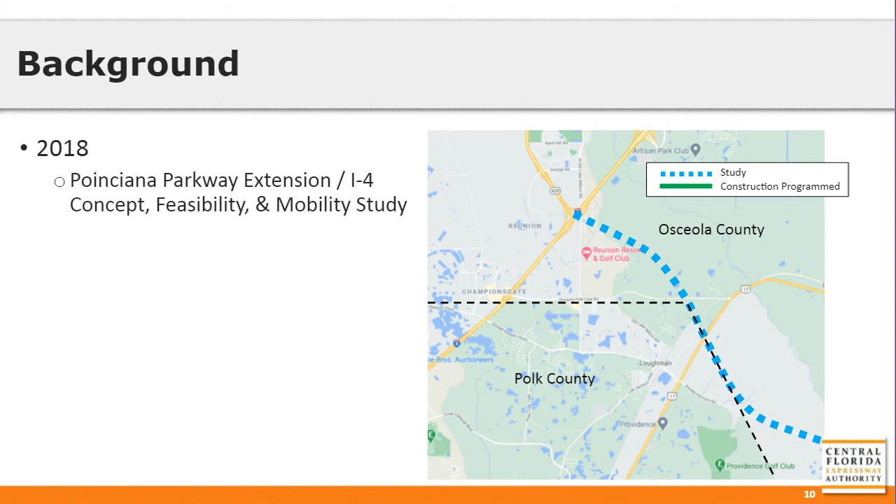This improvement of County Route 532 is part of a coordinated effort to improve the transportation conditions in the area. In 2018, CFX completed a concept, feasibility, and mobility study to determine how best to improve and extend Poinciana Parkway to I-4.

In 2019, CFX then completed a project development and environment, or PD&E study, to determine the alignment for the extension of the existing Poinciana Parkway to County Route 532. This study also identified the need to improve the connection of County Route 532 over to I-4. The study findings were shared with other transportation agencies, including the Florida Department of Transportation, to ensure that roadway improvements were made in a coordinated fashion.

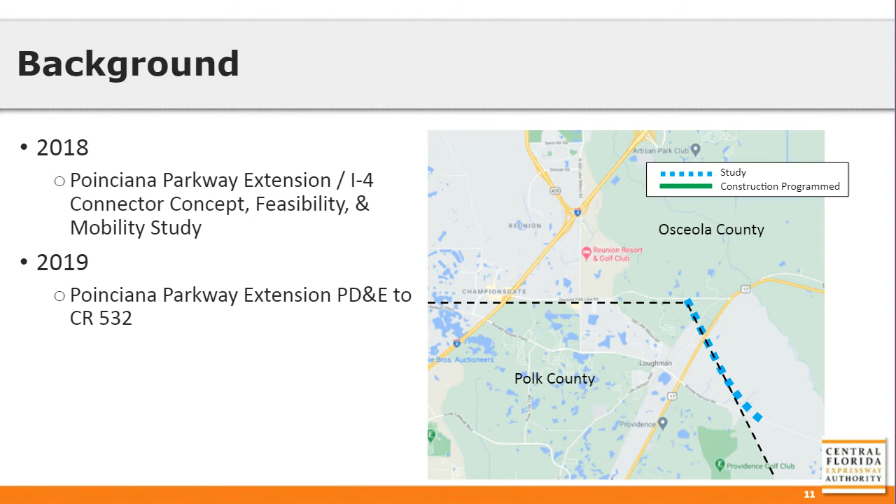In 2020, CFX began the design of the Poinciana Parkway extension from the existing Poinciana Parkway up to County Route 532, and expects to begin construction of that section in 2022.

Currently, CFX, in partnership with Osceola County, is studying and will design improvements of County Route 532 from South Old Lake Wilson Road to US 17-92. Construction of this project is expected to begin in late 2022 and will provide a 4-lane connection from the Poinciana Parkway to I-4.

Recognizing the congestion at the interchange of County Route 532 and I-4, FDOT and Osceola County have started designing improvements to that interchange. Due to congestion on I-4 between County Route 532 and State Route 429, FDOT and Florida's Turnpike are currently designing additional lanes on I-4 between County Route 532 and State Route 429.

Construction of the improvements to the interchange of County Route 532 and I-4 will begin in the spring of 2021, and construction of the improvements to I-4 are expected to begin in the fall of 2021.

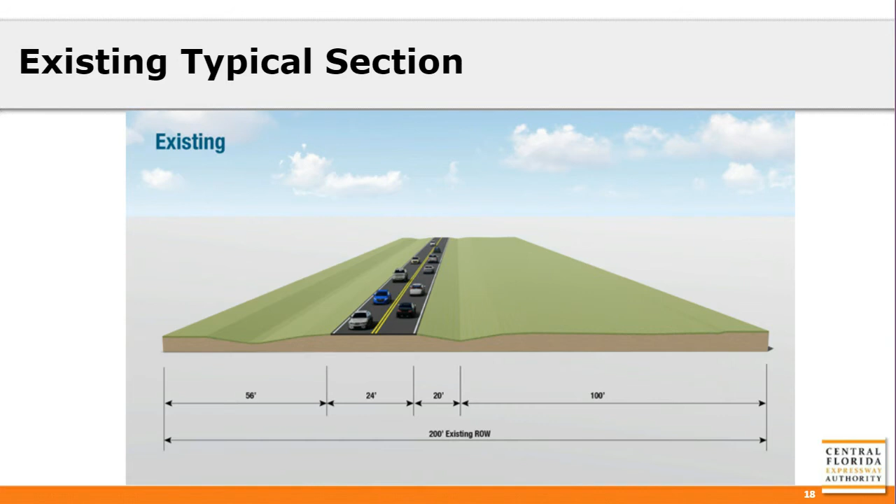We will now discuss the project alternatives. This graphic shows the existing roadway typical section of County Route 532, which is a two-lane undivided roadway located in the northern half of the existing right-of-way.

Three build alternatives are being analyzed for County Route 532, with the primary difference being the typical section of the roadway. No additional roadway right-of-way is required for any of the alternatives. However, additional right-of-way will be required for stormwater runoff ponds.

This slide, along with the next two slides, focuses on the differences between each alternative. All three alternatives include a 4-lane divided roadway with 12-foot lanes, a variable width planting strip for landscaping on both sides of the roadway, a 10-foot shared use path on the north side, and a 5-foot sidewalk on the south side of the road, which may be substituted with a 10-foot shared use path if desired. All three alternatives also have an enclosed drainage system with curb and gutter along the outside lanes.

Alternative 1 includes a 30-foot raised median in the center of the roadway, 4-foot inside shoulders, and 7-foot bicycle lanes in each direction. The design speed for this alternative is 50 miles per hour. Please keep in mind that the design speed does not mean that's what the posted speed will be when the project is complete. It is simply the speed that the road is being designed to.

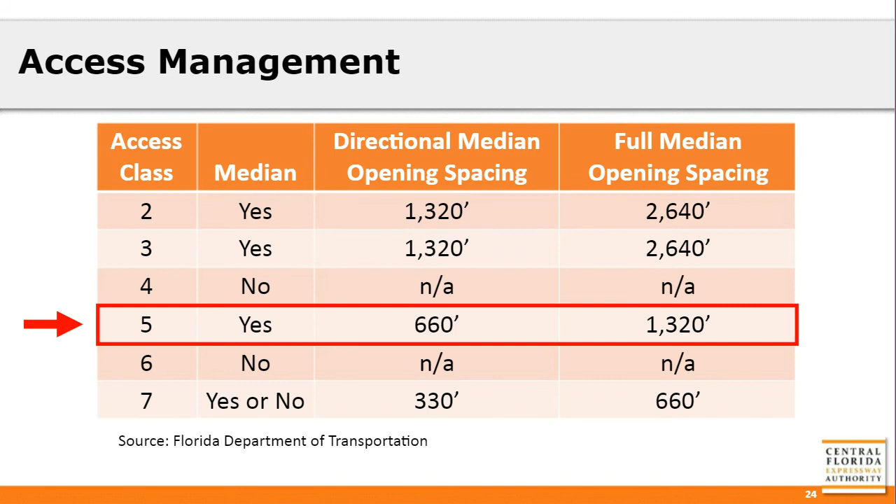This slide depicts our draft access management plan, which is currently under evaluation and subject to change. As a reminder, directional median openings allow for right in, right out, and left in turning movements accessing the side street. However, left turns out from the side street are not permitted.

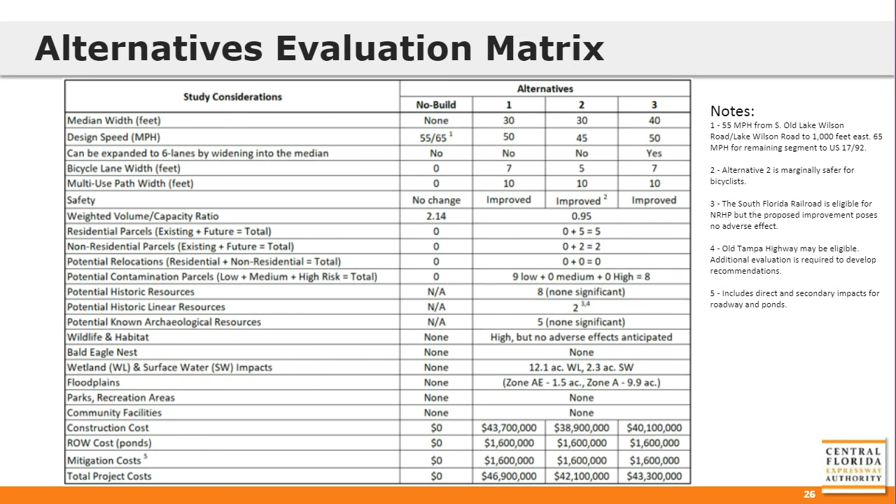The next steps as we go through the process will be to identify a preferred build alternative, finalize engineering and environmental analysis, prepare the engineering and environmental report, and present our findings to both the CFX Governing Board and the Osceola County Commission.

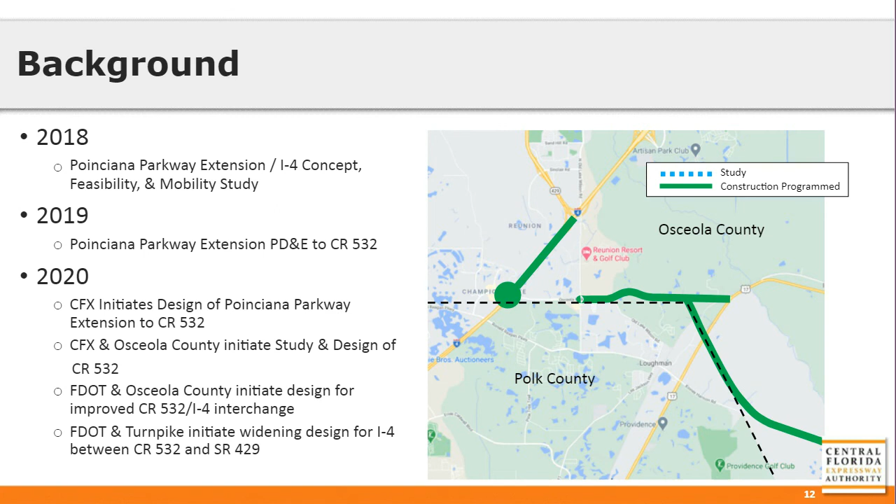Okay, very good. And then, so why exactly is the study being done for the County Road 532 widening? Well, before the project can be designed, the study portion of the project is to provide CFX and Osceola County the information that they need to decide on the preferred typical section for the roadway.

Now, because CFX is involved, does that mean that there's going to be a toll associated with County Road 532? No, absolutely not. CFX and Osceola County are partnering on this project because the extension of Poinciana Parkway will end, at least for a number of years in the future, at County Route 532. And traffic is expected to increase along County Route 532 in the future as drivers from Poinciana Parkway Extension make their way over to I-4. But there is no plan to put any tolls whatsoever on County Route 532 itself.

Okay, and you had mentioned Polk Parkway there. Poinciana Parkway, that there are plans to extend that to I-4, correct? Yes, I apologize, you're right. Poinciana Parkway is shown in the graphic here. CFX is currently widening the existing section of Poinciana Parkway to 4 lanes, and then there's currently a design to take that section all the way up to County Route 532, as we've already discussed. And then from that point, the Florida Turnpike is considering extending Poinciana Parkway past County Road 532 up to I-4. And the Turnpike is currently conducting a project development and environment study on that extension to determine the best alignment.

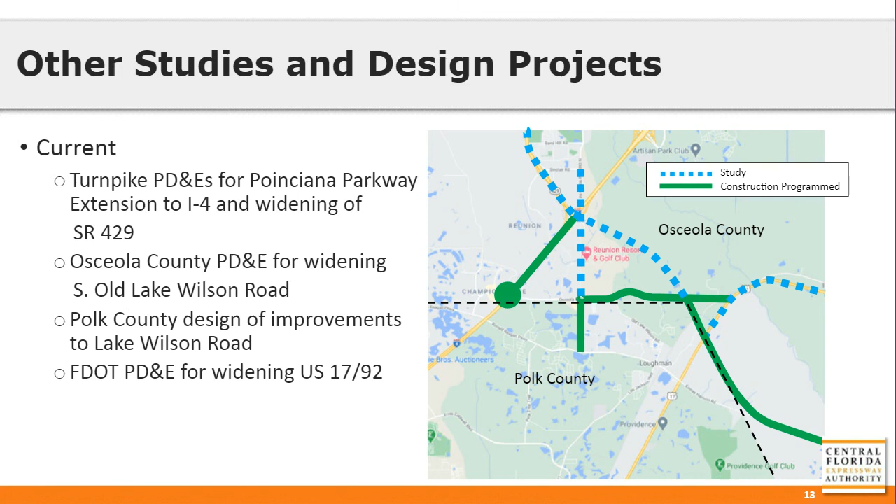Dana, thinking about the study and everything that's happening, when do you anticipate that this study portion will be complete, and then what are the next steps? Certainly. This study was started in June of 2020 and is currently underway, as we discussed, and it's anticipated to be completed by July of this year, 2021. The project will then very quickly enter into the design phase, and that should last about a year.

And then what occurs after the design phase?

Once the design phase is completed, construction is already funded in the CFX work plan, and it could start as early as late 2022 or early 2023. The widening completion is expected to coincide with the completion of the Poinciana Parkway extension, which should all occur around the fourth quarter of 2024.

Okay, very good. And I know that people in the area, quite often when we have construction projects, are concerned about potential impacts from construction. Will property be impacted by construction?

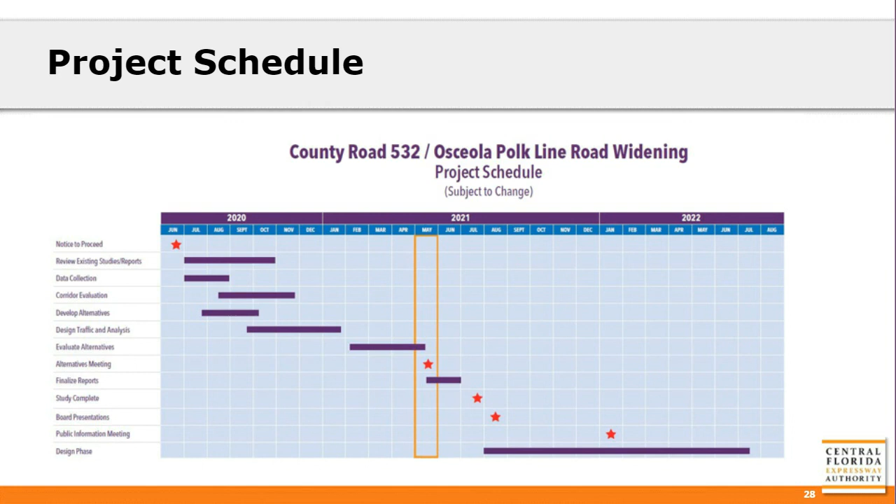Yes, we certainly understand people's concerns about access to their properties. Access will remain for all properties along the corridor during construction. So no matter what construction is going on, people will still be able to access their homes or their businesses throughout the life of the project.

However, if someone has a specific concern, we ask that they provide us with their property address or parcel ID, some way that we can identify where the property is. Then someone will follow up with you to discuss the location of your property in relation to the study alternatives or even during construction itself.

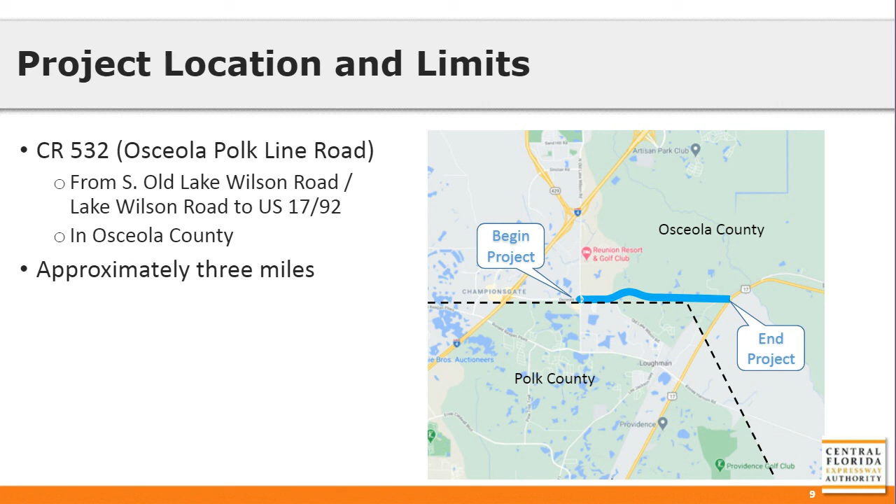All right, terrific. And we do have a question about when land acquisition might begin for this project. Could you speak to that?

Certainly. Again, I want to remind everyone that we don't have a need to take a long stretch of right-of-way along the corridor, as you might see in some projects, because the right-of-way is already out there for us to do the roadway widening itself.

One other thing that we've had happen in the past is we've had some folks ask us if there are sound walls associated with the project. No, there are no sound walls associated with this particular project. There will be no sound walls along County Road 532 when the construction is completed.

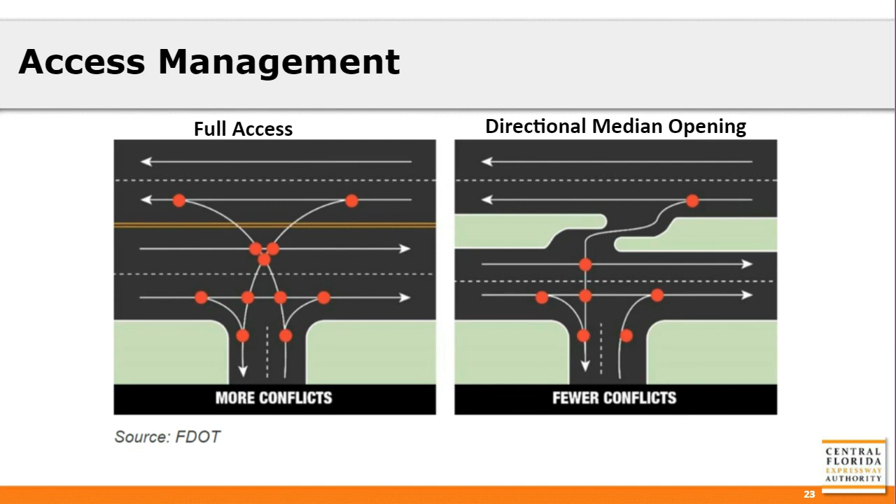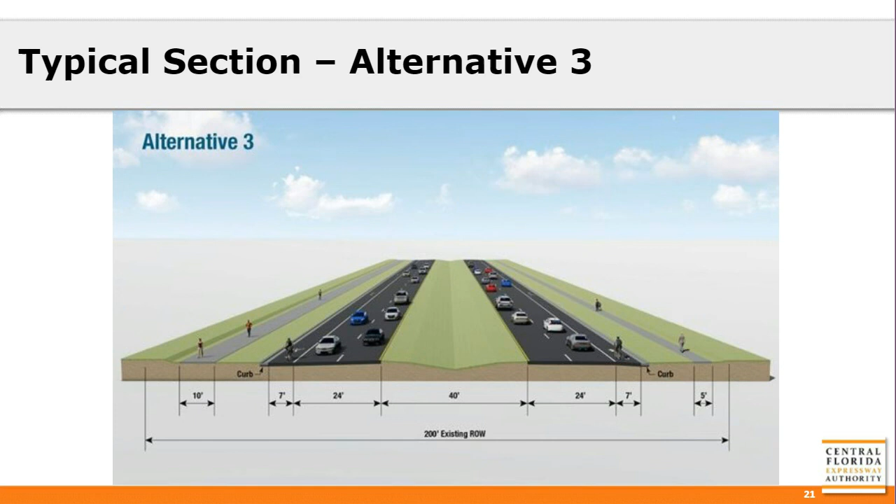Okay, thank you very much for running through that. I did want to ask folks one more time, Cliff, or Dana, if you could touch on the issue of potential pond sites. I think, as you all had said, the actual widening is anticipated to be within existing right-of-way, but could you take us through the pond sites?

No, that covers it great. And then even as we're looking at Basin 4, we've gone through the extra step of trying to accommodate Basin 4 and the adjacent Basins 3 and 5, again to reduce the number of ponds that might be needed.